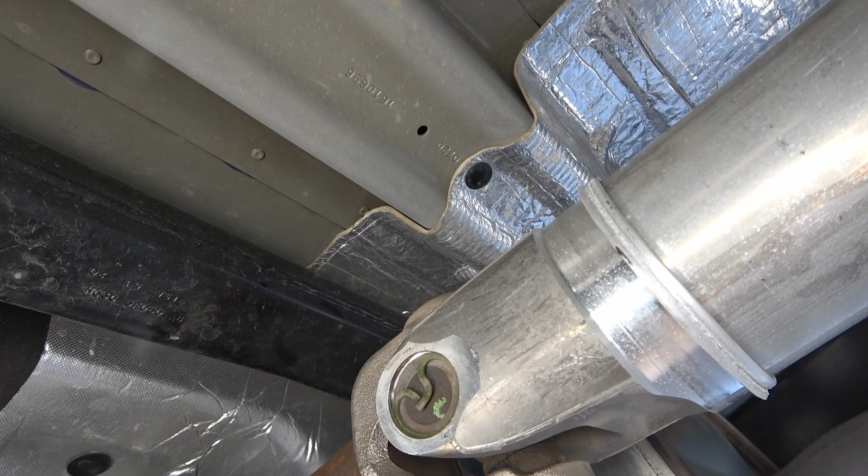Got another recall. This one is for the 2017 to 2022 Super Duties, specifically the 6.2 and 7.3 gas. You diesel guys, don't run away, because this will probably apply to you too. It's probably going to apply to the F250, 350, 450, 550, however high they go. About a month ago I put out a video for the F150s, and they had this exact same drive shaft recall, so I was wondering if it would migrate over to the Super Duties.

Here we go. Basically what's happening is there are some insulators underneath the truck. They're falling down and touching the drive shaft, and as the drive shaft spins, it runs a groove into it, which could undermine the drive shaft and potentially cut it in half, making it break and fail completely. That'd be a really bad day.

I've got a bunch of documentation we're going to go over in a few minutes. But before we get started, we're going to crawl under my truck and see if I've got these insulator problems. I hope I don't. I haven't actually received this recall myself, it's just been all over the internet, seen a lot of different forums and websites talking about it, so I figured I'd cover it. We'll jump under my truck, see if I got that, then go inside and go over all this information. I'll put a link in the description so you can open this up as a PDF and click on it. This will show what the dealerships are going to be looking for, how to inspect it, and how to repair it. So yeah, let's get started.

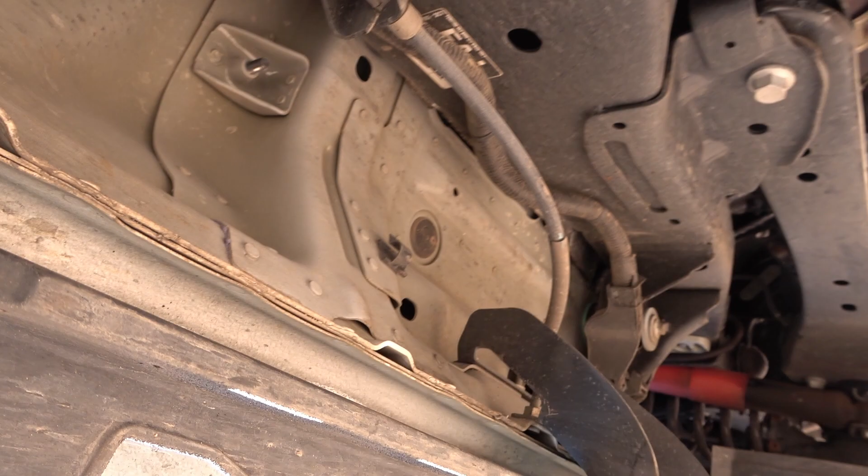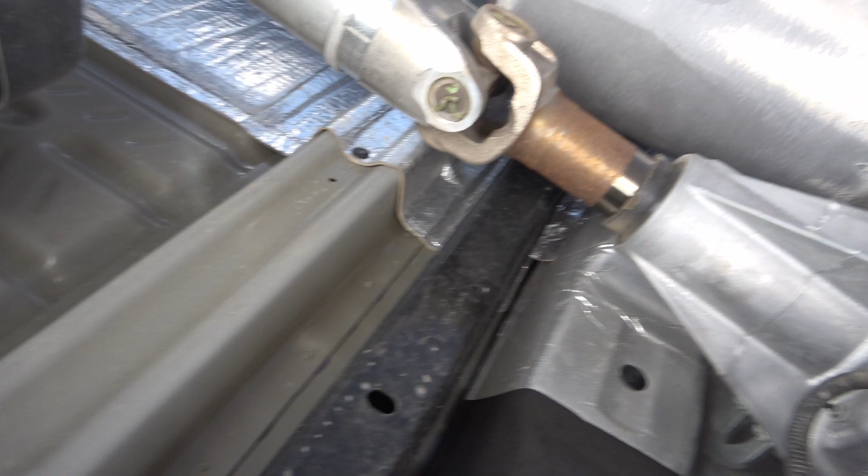All right, let's see where we're at. Okay. There's my drive shaft. These over here are the insulators. Maybe have another one over here. Those seem like they're glued up under there pretty well.

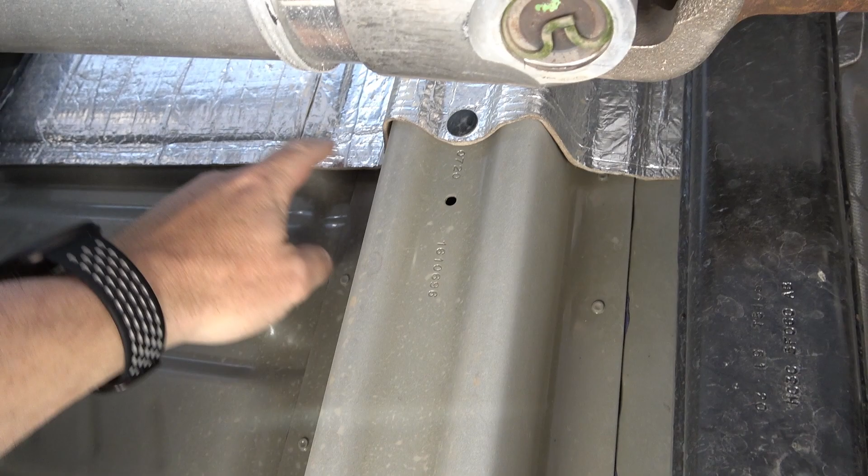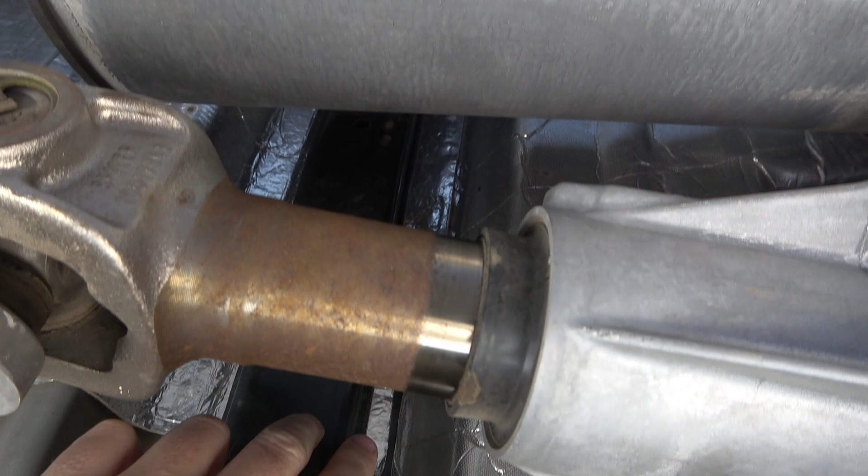This one over here is probably, let me see. Mine seem to be attached pretty well. You've got these little rivets or something that hold it in. It goes under this cross member, comes out on the other side over here. This is what's falling down right here, touching on these drive shafts. I don't see any marks or scores anywhere.

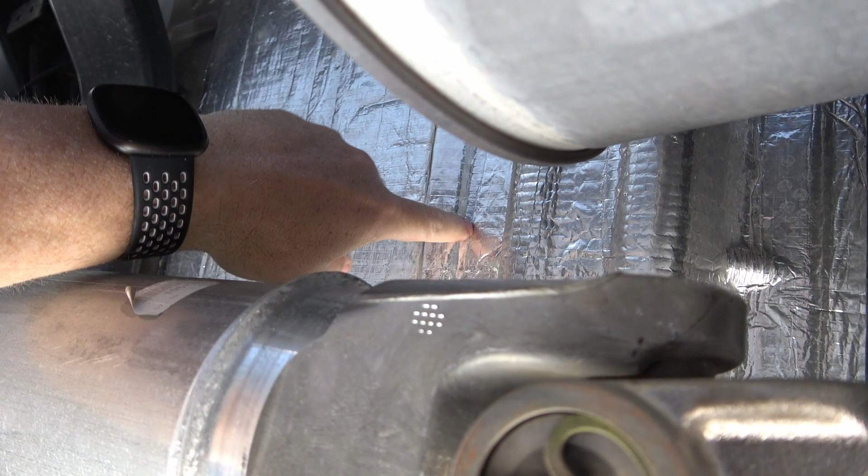Well, I don't know, hopefully I'm good. Let's look up here, you've got more of that insulator stuff. I think this stuff over here is insulator. I don't know if it's necessarily heat protection, I think maybe it just keeps some sound from coming out because you've got the exhaust pipe over here. I'm not sure, there's really not a whole lot of heat coming out of here other than this, but I can't imagine it getting too horribly hot.

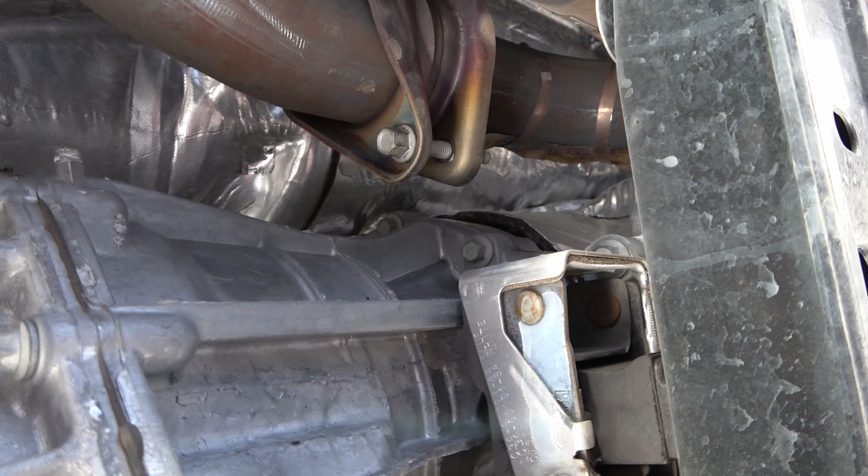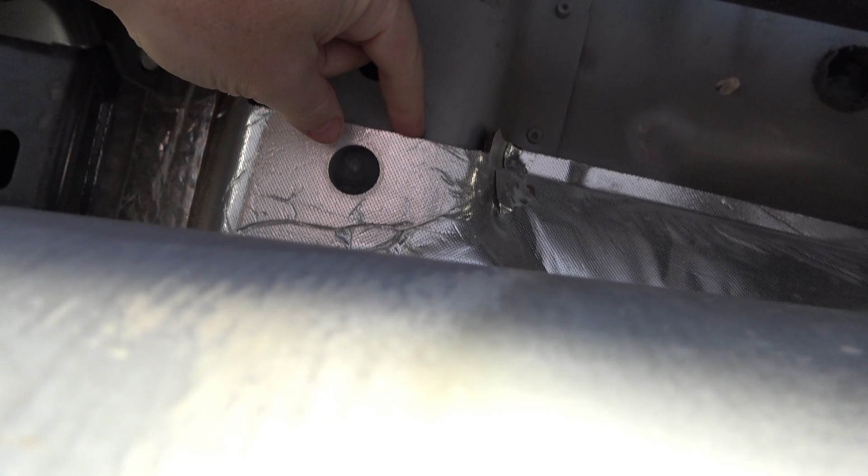Come over here, looks like I got some of that stuff back in there. I got some more over here too. It's kind of hard to tell, but I got some more right here. This seems like it's on here pretty well.

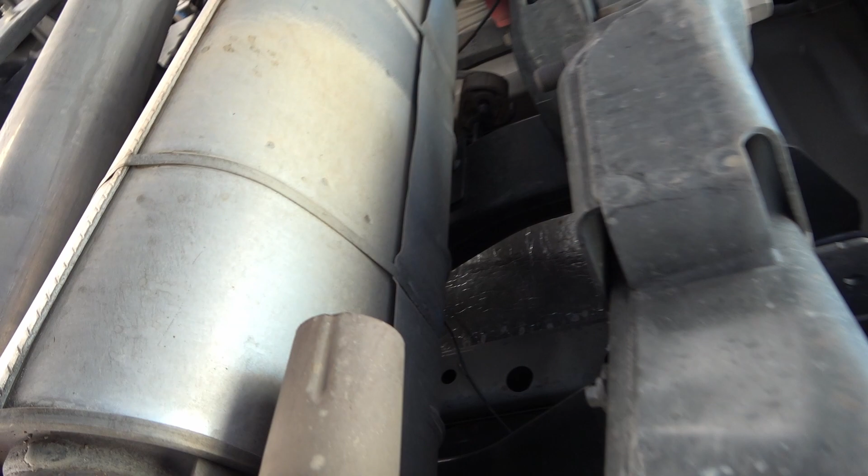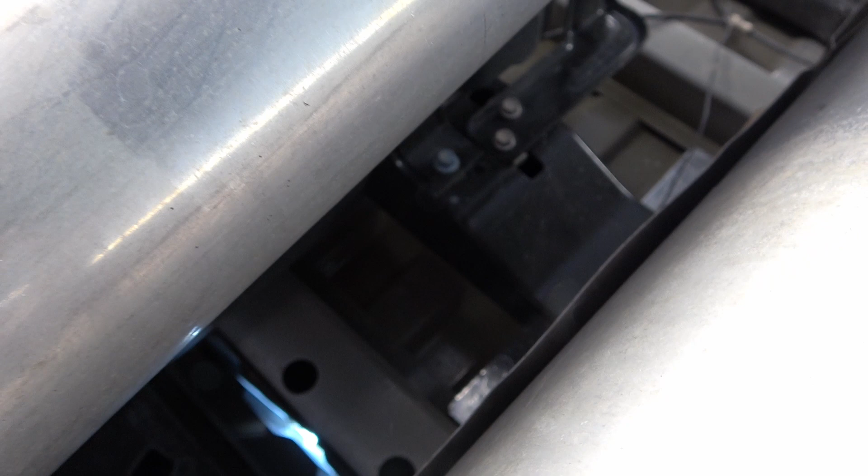All right, let me slide towards the back of the truck, see if I got any more back here, which I do. So this is the back of the drive shaft over here. It might look upside down and sideways on video, tough for you guys to figure out my orientation, but there's my back exhaust pipe, my differential back there. Looks like I got some more insulation up here, and it all looks like it's affixed pretty well. I guess it could have the potential of falling all the way down and getting on the drive shaft back here, but it'd probably be pretty tough for that one to come down.

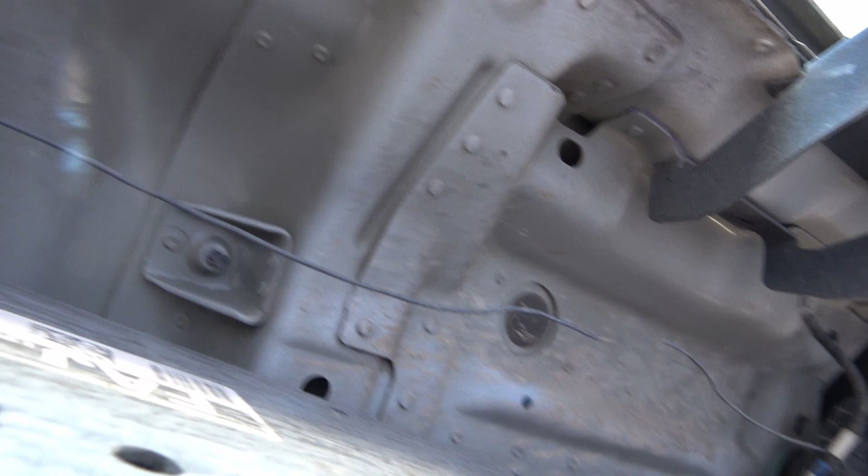The only one I'm going to slide back up front and check, the only one I see that could be a potential issue is this one right here, because it's directly over my drive shaft. And it seems like it's in there pretty good. So hopefully, hopefully I'm not going to have this problem.

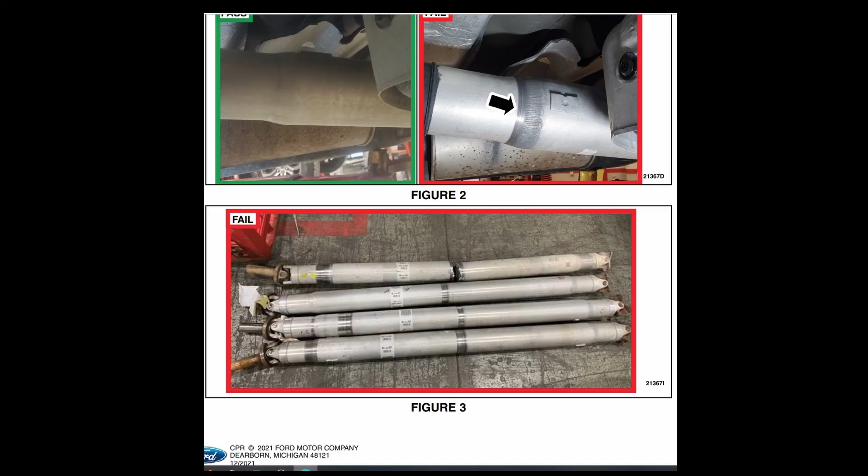Let's get started. One of the things I wanted to show you real quick is, like I was saying earlier, I did the same recall for the F150s a while back, and in that recall they had some pictures of the F150 driveshaft. I just wanted to show them to you real quick because they give you a good idea with these insulators up here. If they drop down, they'll start scoring, and you can see over here, these ones are actually cut in half, and some of these drive shafts are worse than others.

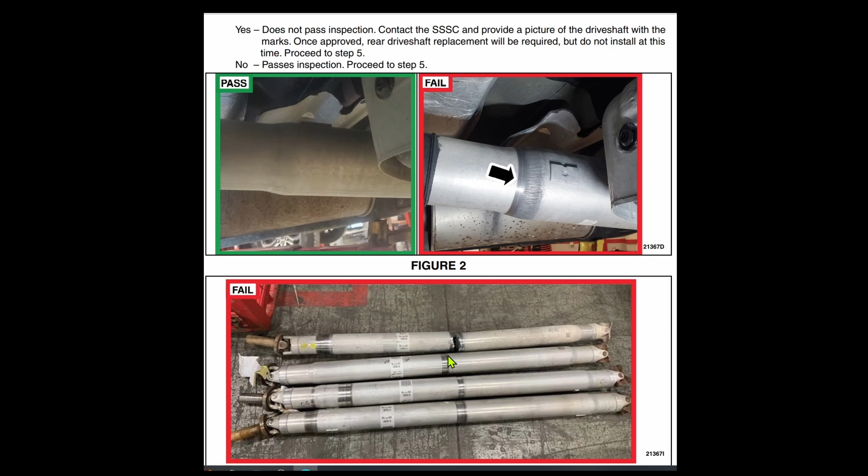Let's get into it, I got 3 documents that I'm going to show you. All 3 of these documents are going to be in the description. If you click on description, go in there, there'll be some PDFs you can click on and open up. There'll be these documents here. These 2 documents right here, a lot of people have seen, they've been floating around the internet, but this last one right here just came out, I believe, today. So this is the one I wanted to go over with probably the most.

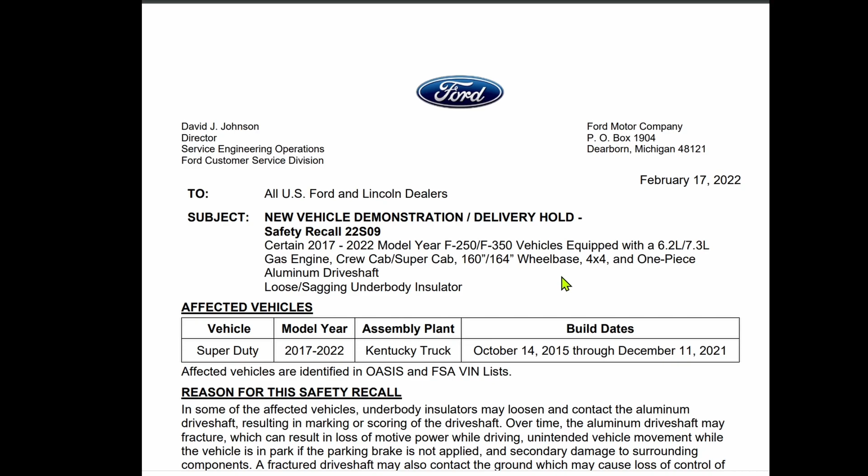This is from Ford basically going out to the dealers and telling them what's going on and what to look for and how to inspect it. You can see this is from 2017 to 2022 model year F250 and 350, equipped with the 6.2 and the 7.3. But again, we just hit the F150s a month ago, and I'm sure this will probably get into what's really the difference between a 450, a 550, a 650, or the diesels. You guys tell me in the comments if your trucks don't have these insulators.

So build dates, October 14th, 2015 through December 11th, 2021. Let me show you how to find your build dates.

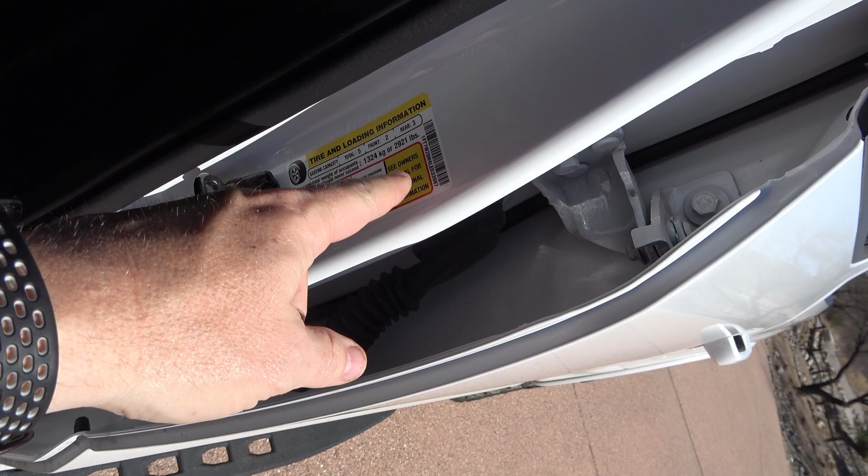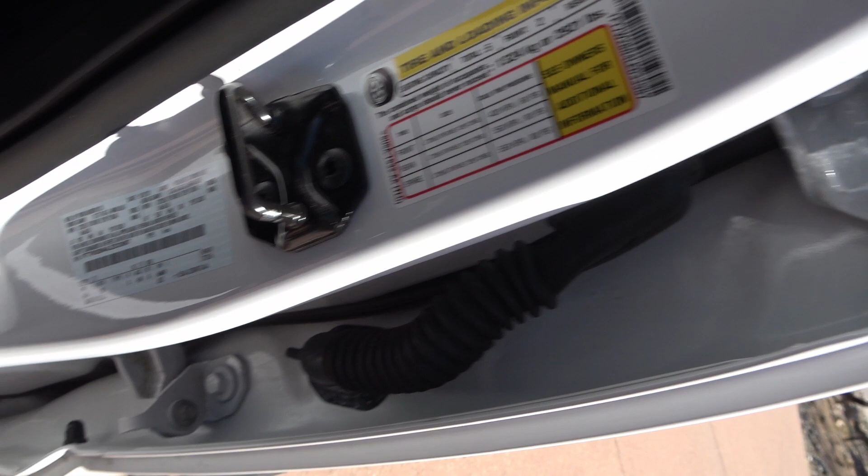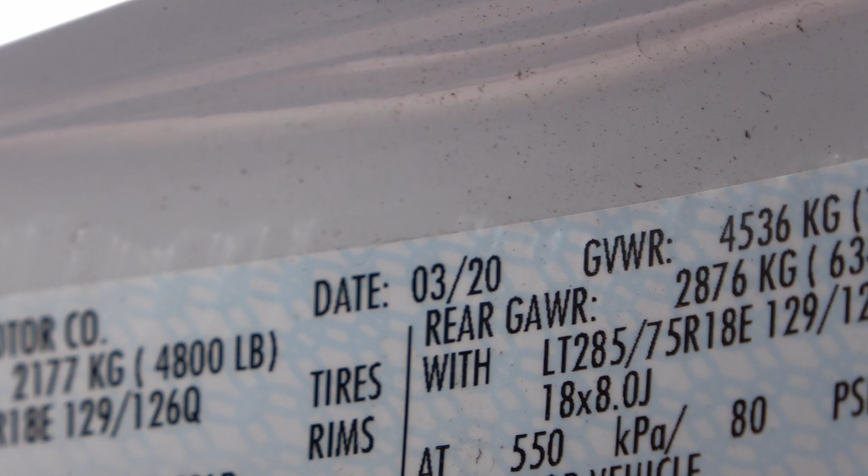Okay, this is where you find your build date, guys. If you open up your door here, you've got your payload sticker up here, which, look at that, 2,921 pounds. Not bad for a F250. If you look below that, you come up here, that's very top, right up there. So I can zoom in on it. Right up there, you're going to have your build date. So it says 3-20, so it was built in March 2020. That's where you get your build dates.

Reason for the recall: in some of the affected vehicles, underbody insulators may loosen and contact the aluminum drive shaft, resulting in marking or scoring of the drive shaft. Over time, the aluminum drive shaft may fracture, which can result in a loss of motive power while driving, unintended vehicle movement while the vehicle is in park if the parking brake is not applied, and secondary damage to surrounding components. A fractured drive shaft may also contact the ground, which may cause loss of control of the vehicle while driving. A fractured drive shaft increases the risk of injury or crash.

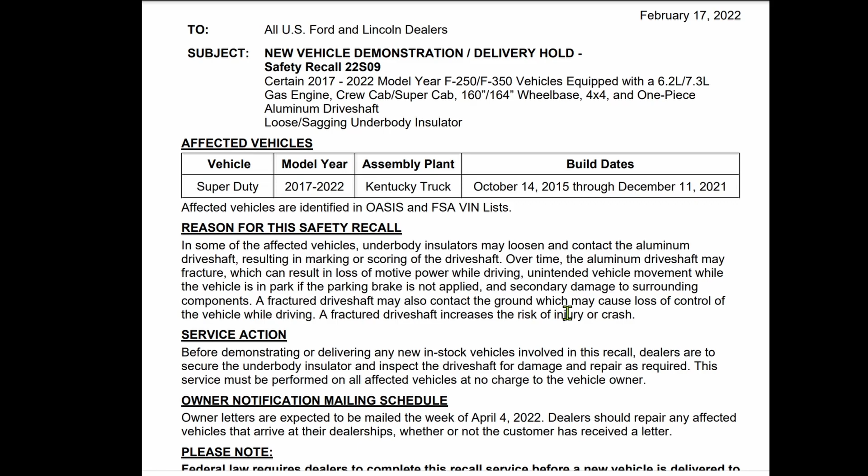Could you imagine pulling a fifth wheel or equipment, or having your family in there? It'd be all kinds of bad stuff going on.

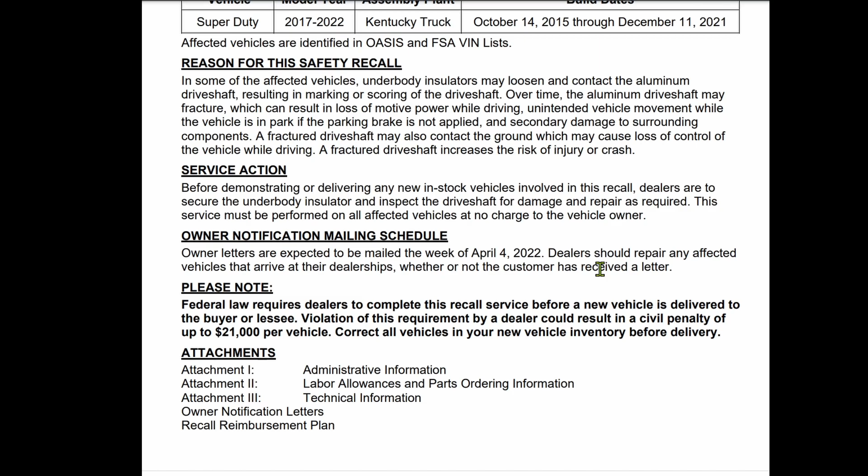Right here it says owner letters are expected to be mailed the week of April 4th, 2022. So we're at February 26th, so all of March and then come April. This is probably something you guys could get under there. And if you needed to wait, because it's probably like anything else, you take these to the dealers and they're going to be like, oh, we haven't heard of that before, or we got to wait for parts to come in. But if I got up underneath there and saw those insulators hanging down, you'd better believe I'd find a way to remedy that before I actually got the warranty repaired.

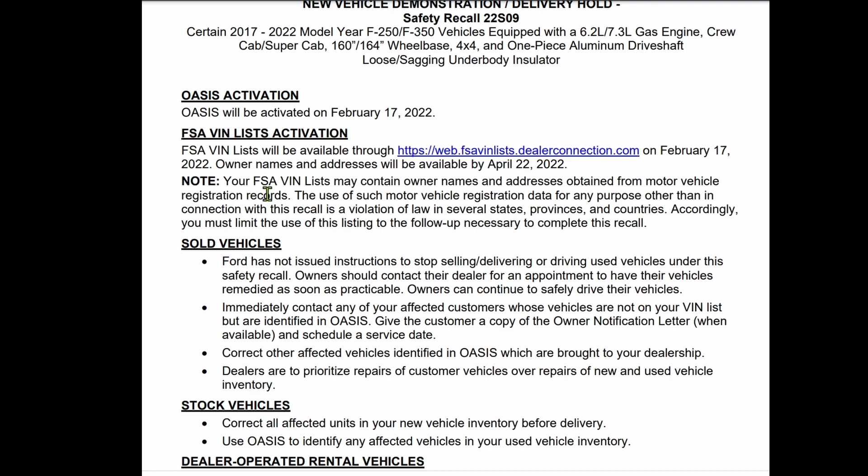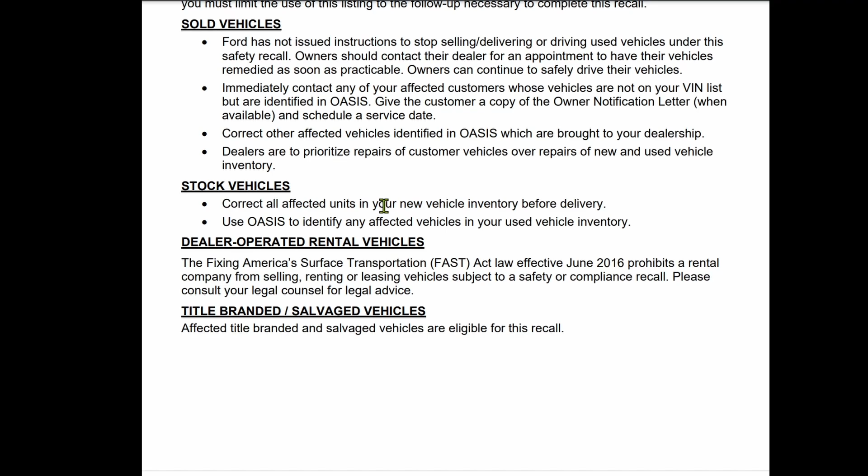All right, so scrolling down. It's like sold vehicles, Ford has not issued instruction to stop selling or delivery. So you could potentially still buy one of these vehicles with this problem. Or, sorry, stock vehicles, correct all affected units in your new vehicle. So if you buy it new, they should be fixed.

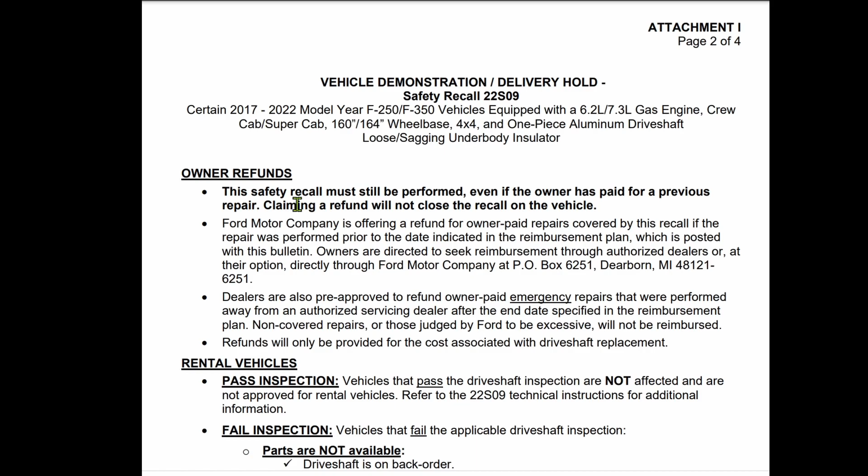And it talks about rental vehicles, owner refunds. Ford Motor Company is offering a refund for owner-paid repairs. So if you do this yourself, or probably not do it yourself, but if you take it somewhere to fix it, they'll probably refund you the difference.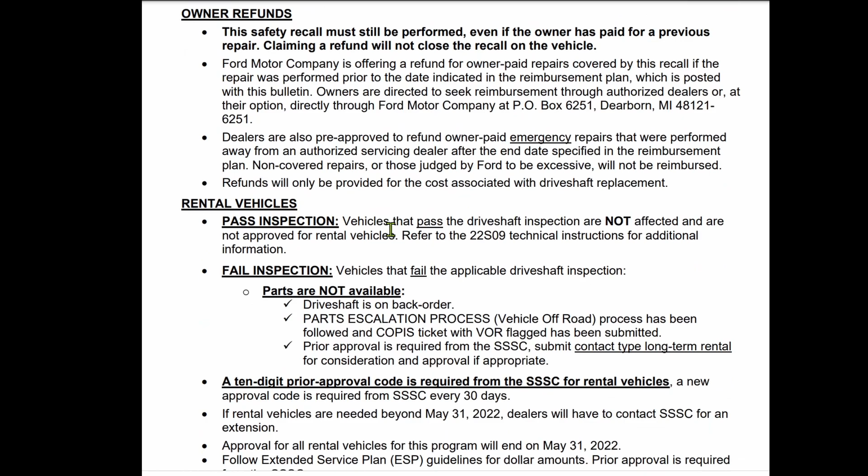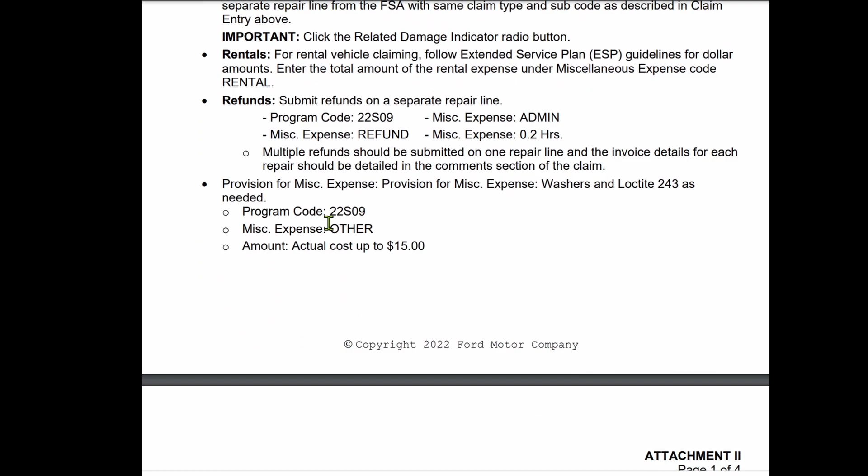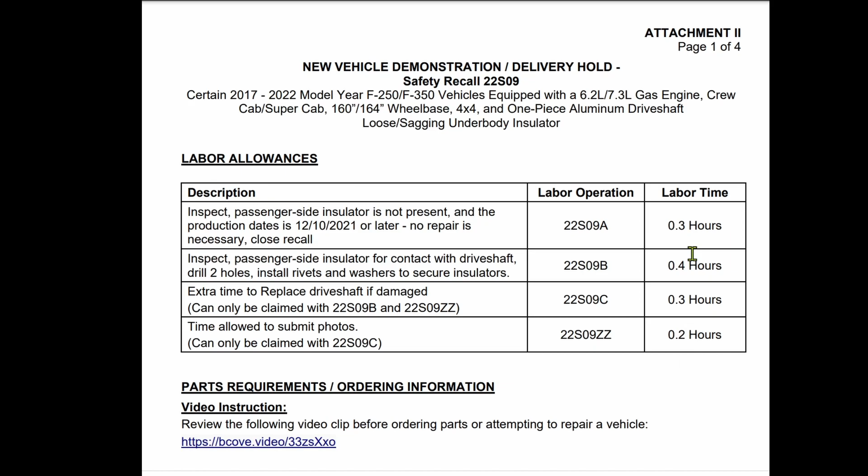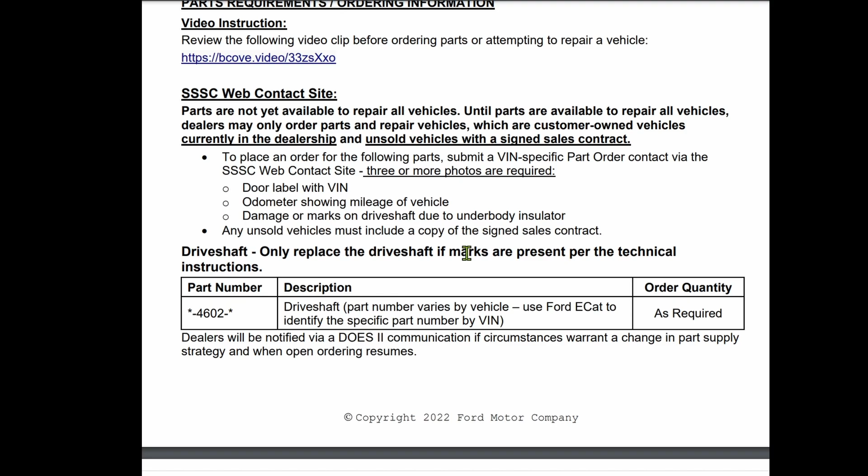So scrolling down, additional repair labor time. Scrolling down, so here's your labor time here. It shouldn't take them that long to fix this. So it's 0.3 hours, 0.4, 0.3, and 0.2. So it looks like probably under a 2 hour fix. And that's, of course, if you don't have a drive shaft problem. If you've got the drive shaft and it's been scoring, it's probably going to require them to take the drive shaft off and replace it.

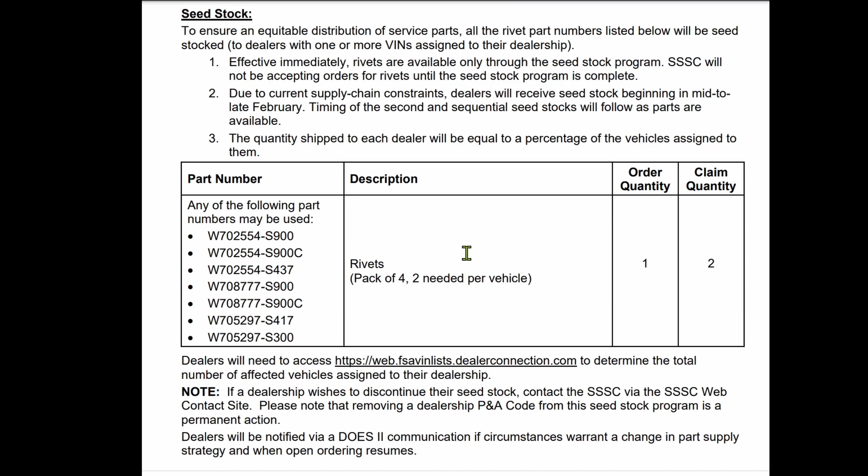Hopefully they'll have those in stock, because if not, then basically you're going to be without a vehicle for a while. So here's all the part numbers, the rivets that they need.

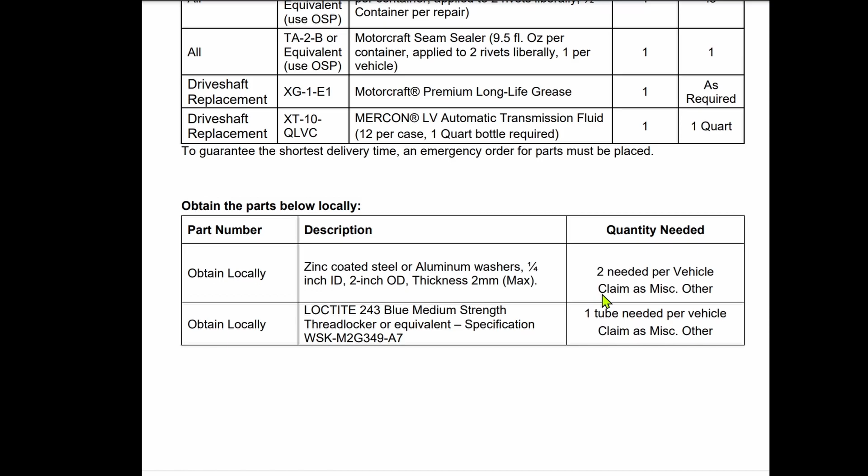Everything that they're supposed to do, and we're going to get into that here in a second. I'm just kind of scrolling through this stuff. You guys can get into it when you want to open up the PDF and read it.

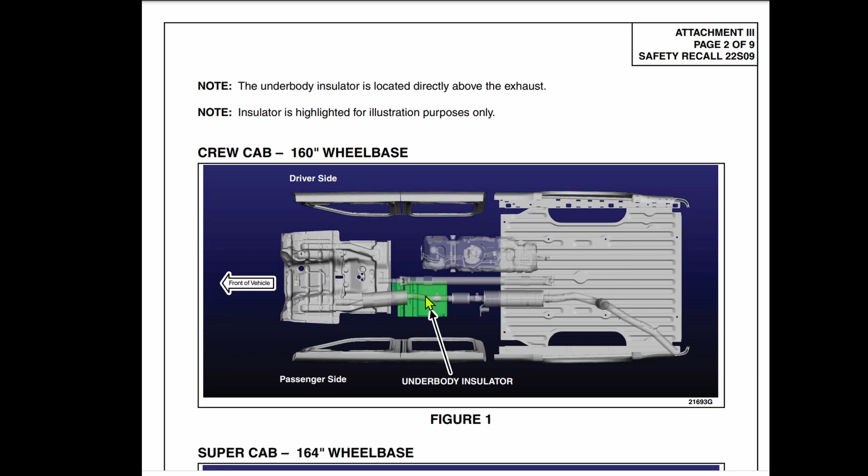So here's a picture of the underbody. You can see, when I got out of my truck, this is exactly where that insulator was that we were looking at. I had some further back here which I didn't think was going to be an issue, and some up here. That one I saw was the one I was looking at the hardest under my truck. It seemed like mine was done pretty well, so hopefully it'll stay that way. If I get the recall letter, I'll take it in and we'll see what they got.

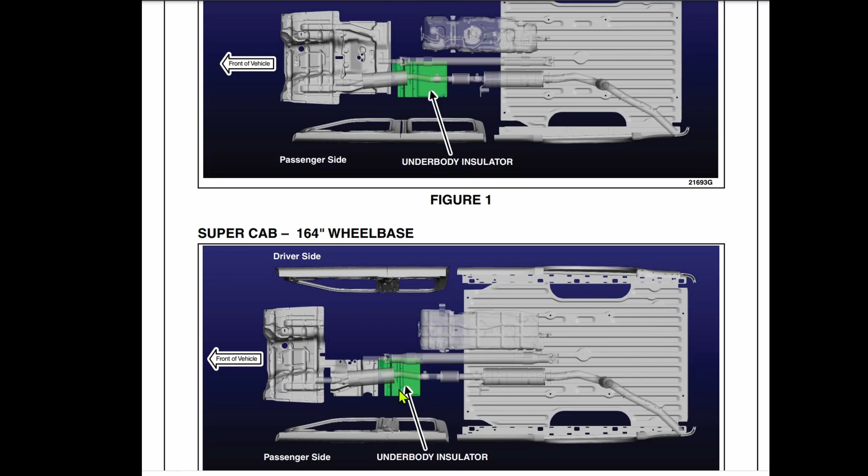So this is actually another insulator. You got the one up here, which is the one that I saw the most, and you got this one, both highlighted in green.

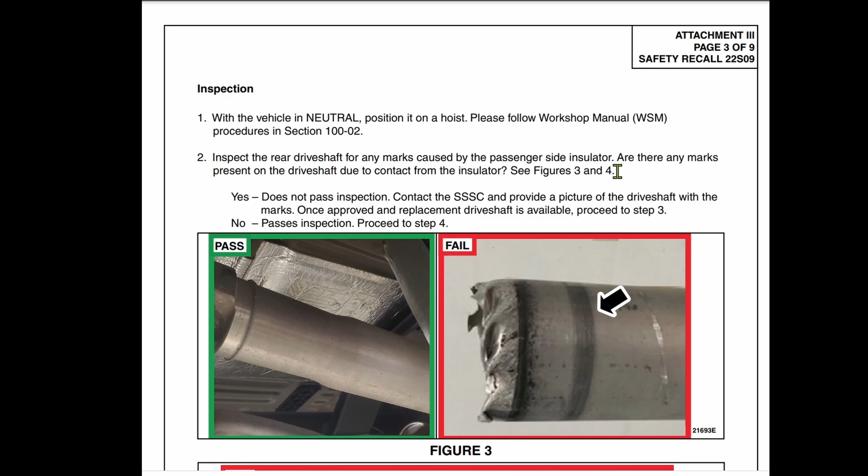So, inspection with the vehicle neutral, position on a hoist. Please follow workshop manual. Inspect the rear drive shaft for any marks caused by the passenger side insulator. Are there any marks present on the drive shaft? Due to contact from the insulator. Here's your kind of yes or no, so this looks like it's a pass.

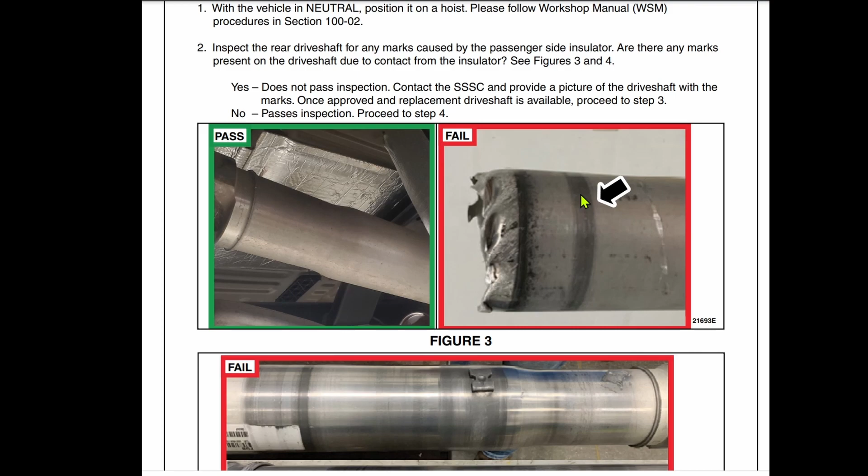Kind of looks like mine. I felt like it was up there pretty good. And you got the fail over here because it's fallen down and started to score the drive shaft. You can see this one, it looks like the drive shaft's been severed in half. You come down here and you can see it's got a big score mark on it.

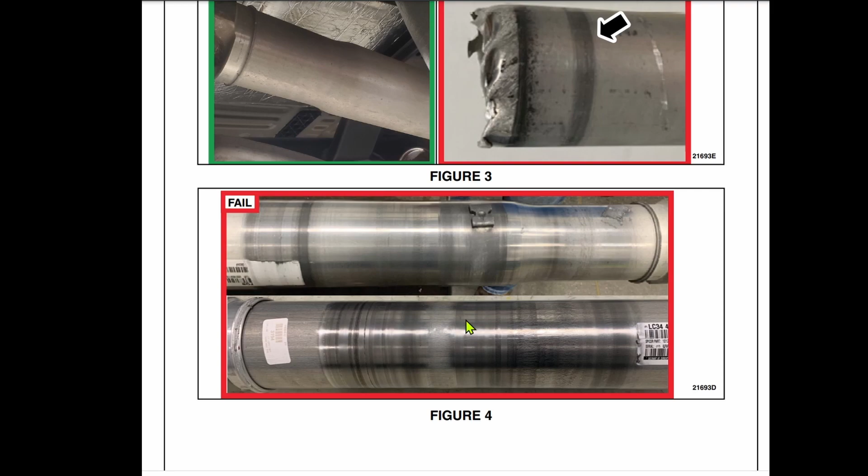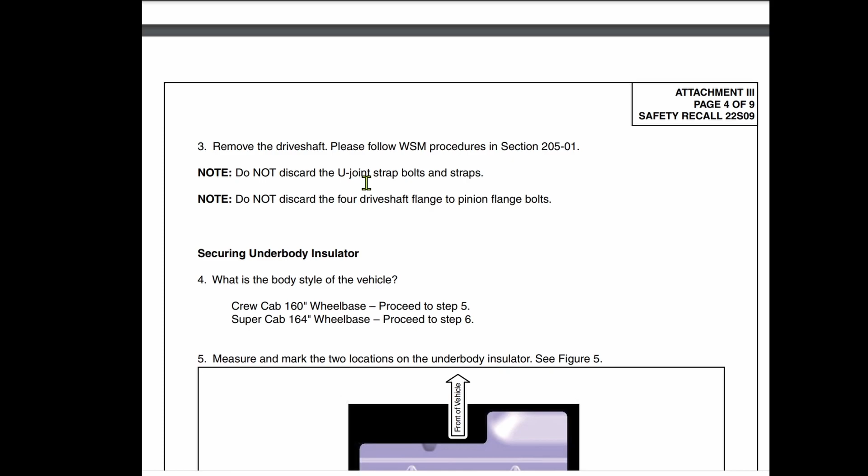All right, so there's your fail. Remove the drive shaft, please follow workshop manual procedures. Do not discard the U-joint strap bolts and straps. Do not discard the 4 drive shaft flange, to pinion flange bolts.

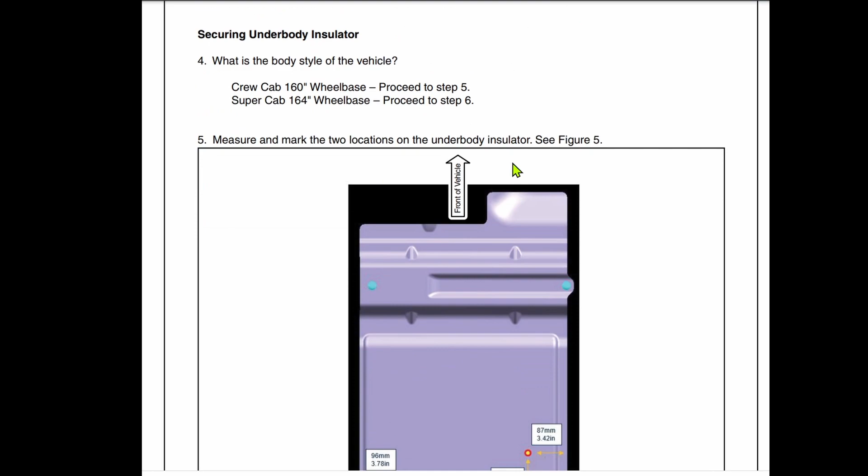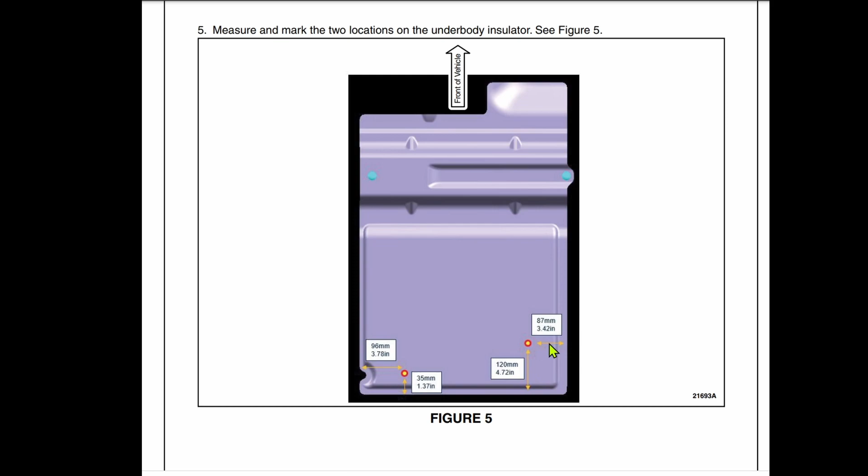All right, so here we go. Looks like this is your insulator. They're marking holes here, looks like that's probably where they're going to drill the holes at.

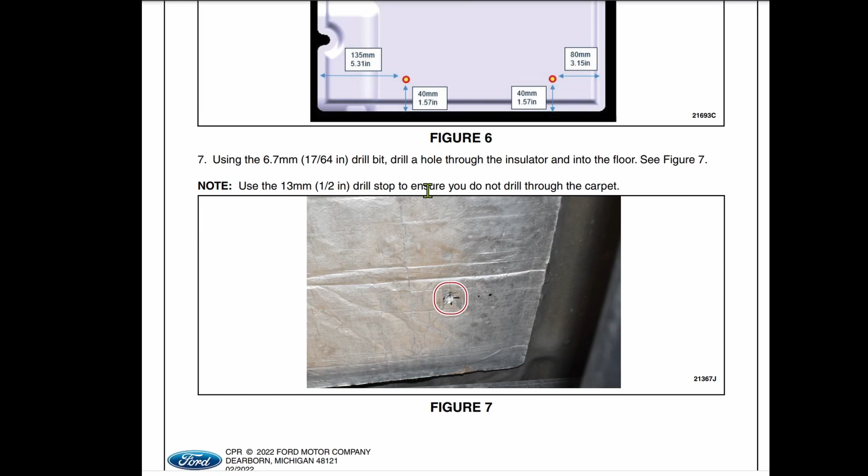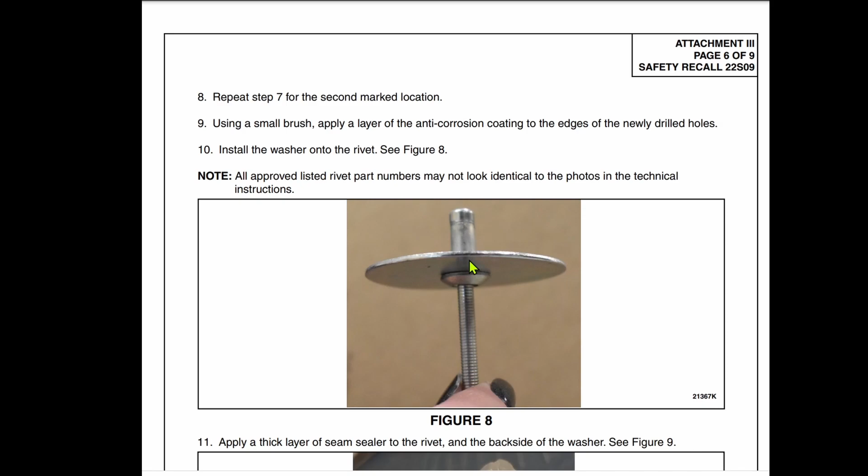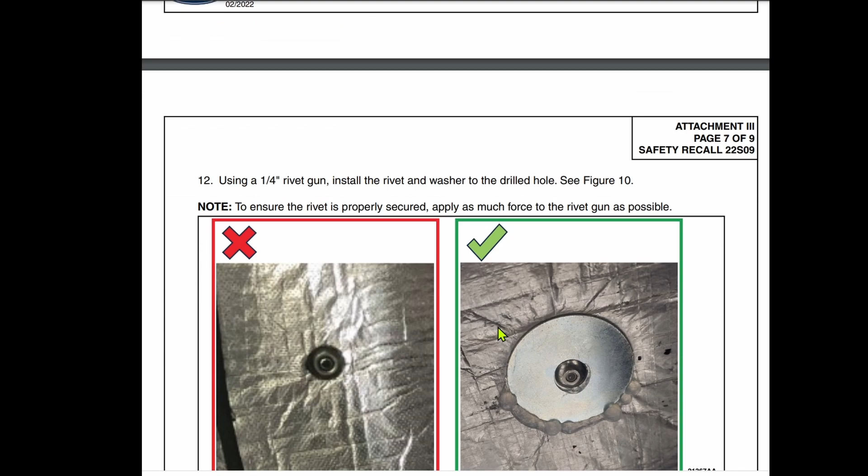Use a 13 millimeter, half-inch drill stop to ensure you do not drill through the carpet. So it looks like they're going to drill through the bottom of the truck in these defined areas. They're going to take this rivet, put some goop on the back side of it to seal it, and push it up in there like that, sealing it up so there's no way it's going to come down.

What I'm thinking is the back side of these insulators probably had some adhesive on there that just lost its tackiness or whatever, and that's why they started falling down.

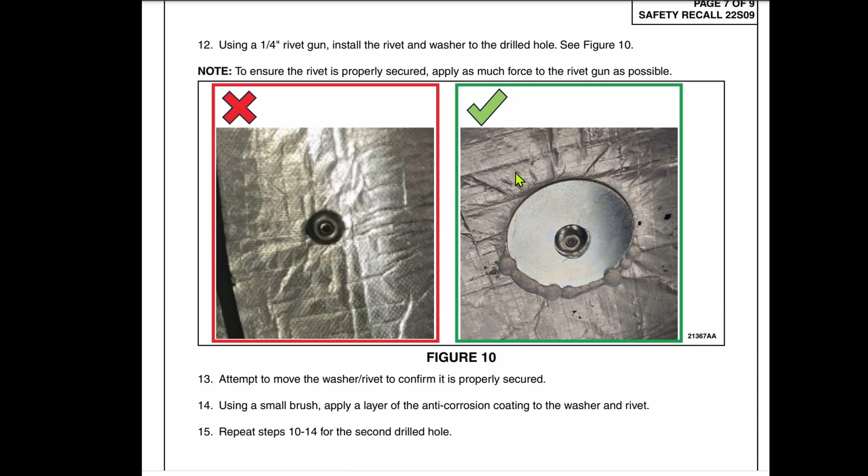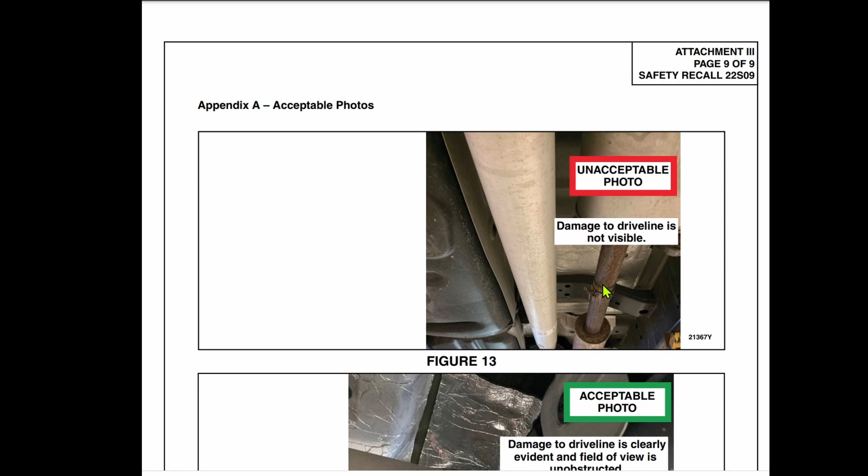So using an air blowgun, remove any debris from the threaded holes. This is just talking about how they take the drive shaft off and put it back on if they need to. Hopefully most of us won't have that problem. These right here are just talking about the photos they need to take, how to take an acceptable photo for the mechanics and send it in, probably to get the warranty covered.

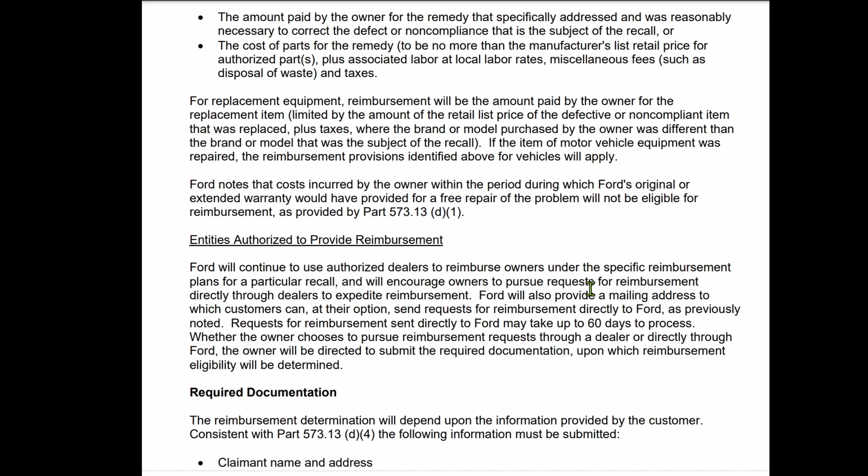And that's pretty much it on this form. And this other form right here, let me read this one to you, because this one had a little bit. You can see up here, so this is interesting too.

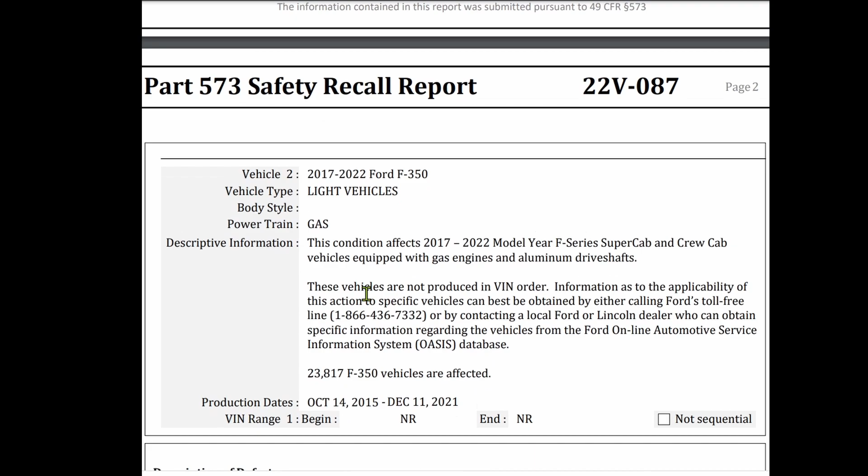So the F250 has 223,628, and the F350 has only 23,817. So it's kind of interesting that in the Tremor model, and only the Tremor model, the F250 and the 350 are the exact same truck. Everything about them is the same except for the decal on the side and the payload sticker. So I don't know why one vehicle over the other would have more affected.

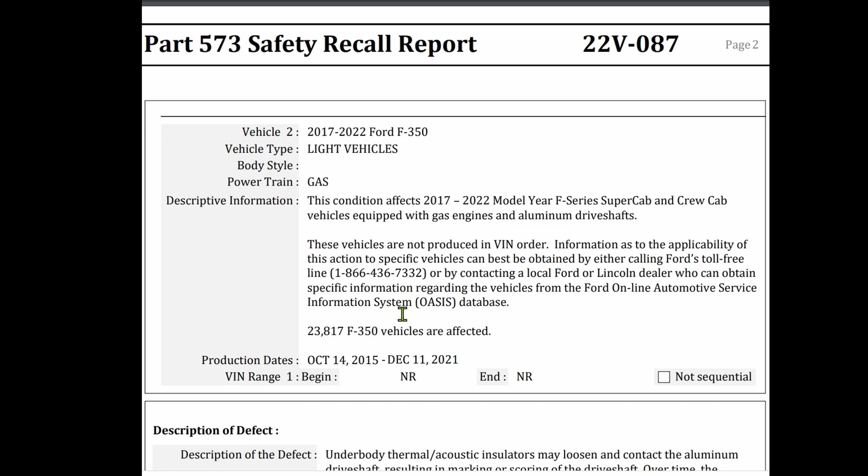So that's why I'm kind of saying the diesel guys, and 450, 550 owners, probably should go out there and check this.

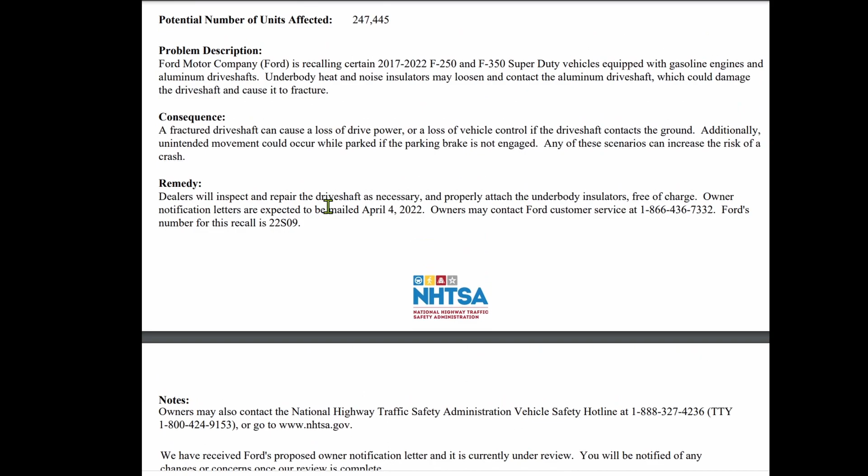I think this is what I wanted to read to you guys. Actually, let me look at this other one. I think one of them in here talks about there was 40 vehicles that came in. I guess they had these drive shafts that actually had separated on them, and that's what caused this whole thing. But it's probably buried in here somewhere, and I don't want to waste too much of your guys' time trying to find it.

So these documents will be in there, you guys can review them. Hopefully this helps you guys out. Get out there, check your trucks.

Oh, here you go. So in January 2022, Ford completed its review of search of vehicle records for reports of broken drive shafts. Ford is aware of 40 reports received from July 28, 2017 through November 15, 2021, alleging broken drive shaft potentially related to sagging passenger side underbody insulators. So this has been going on since July 28th of 2017, it looks like, up until now.

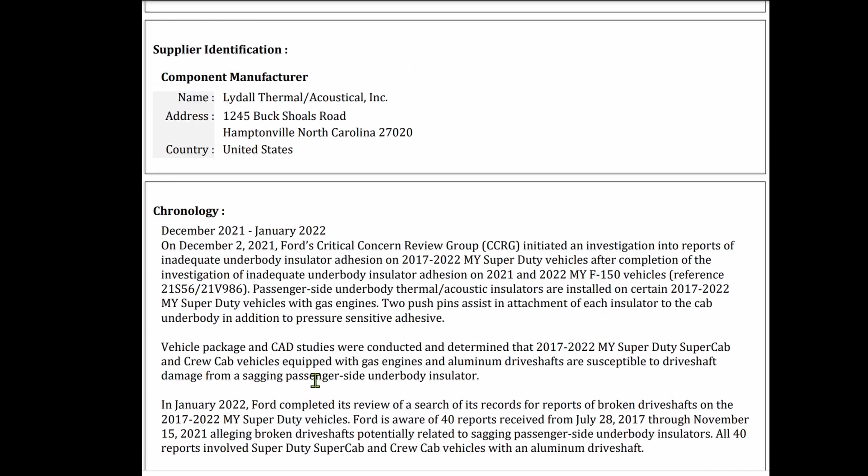But anyways, you guys review this, go out to your trucks, check them out, inspect them, make sure that insulator isn't hanging down. If it is, if it was me, I'd remedy that real quick and then make contact with the dealerships and let them fix it as they find the parts. But this is something I think you guys could fix real quick while you're waiting for the warranty.